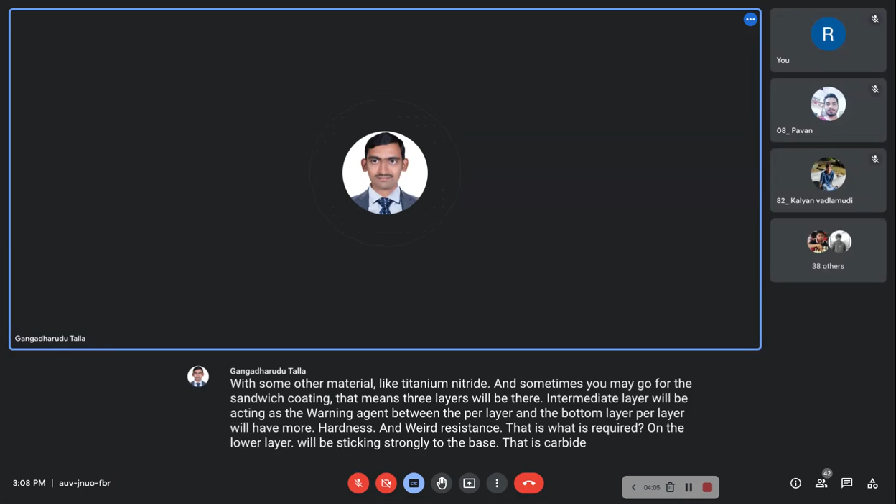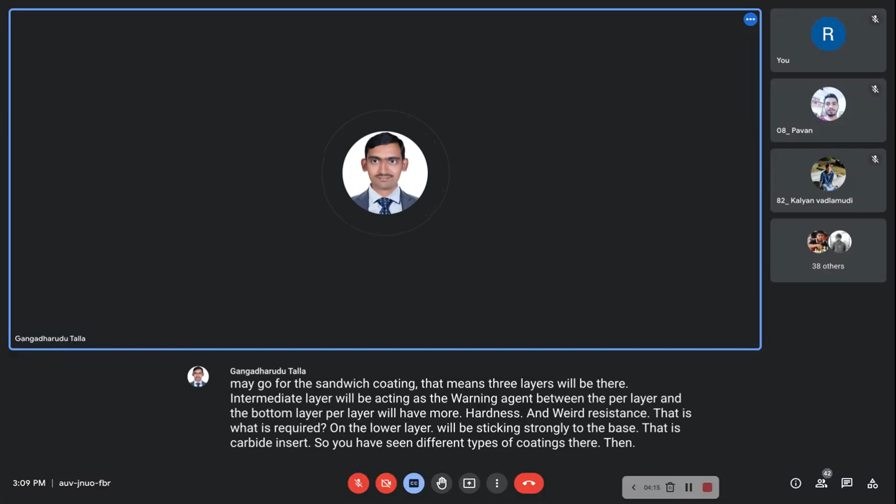So you have seen different types of coatings there. Then we have also discussed the ceramic materials. Mainly alumina is the widely used ceramic tool material, and some portions of silicon carbide, etc., will also be there. Okay, now I am presenting.

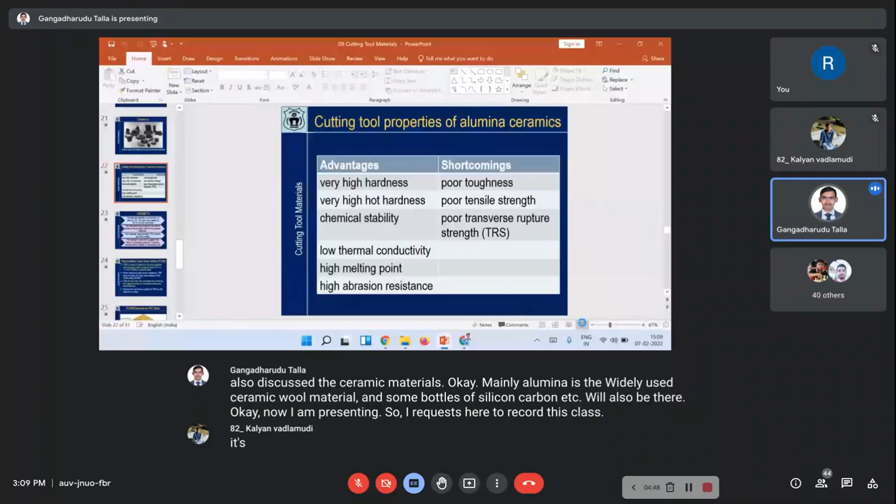So this we have seen in the last class: cutting tool properties of alumina ceramics. Now the next is cermets. As the name indicates, it is the combination of ceramics and metals. As we understand, ceramic has good heat resistance, very good hardness and very good wear resistance, etc. But the thing is, it is very fragile or brittle, so it can break when you are applying some transverse force. It will easily break. So to reduce that tendency, these cermets can be used.

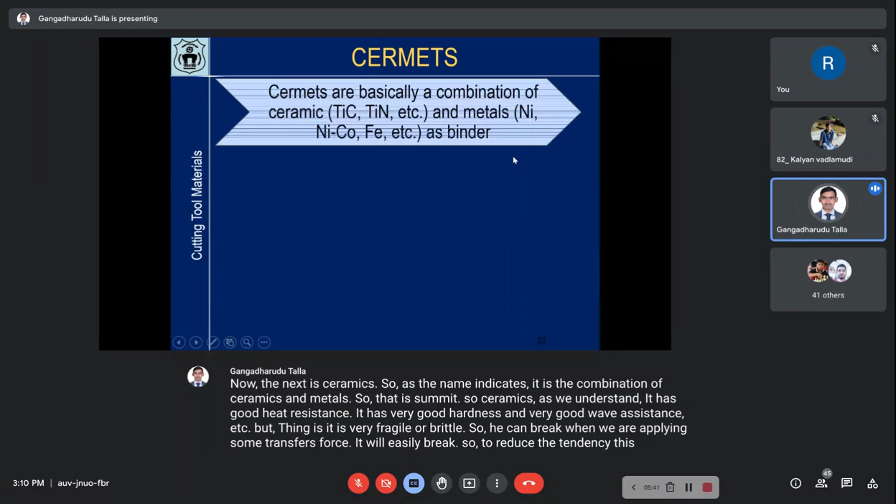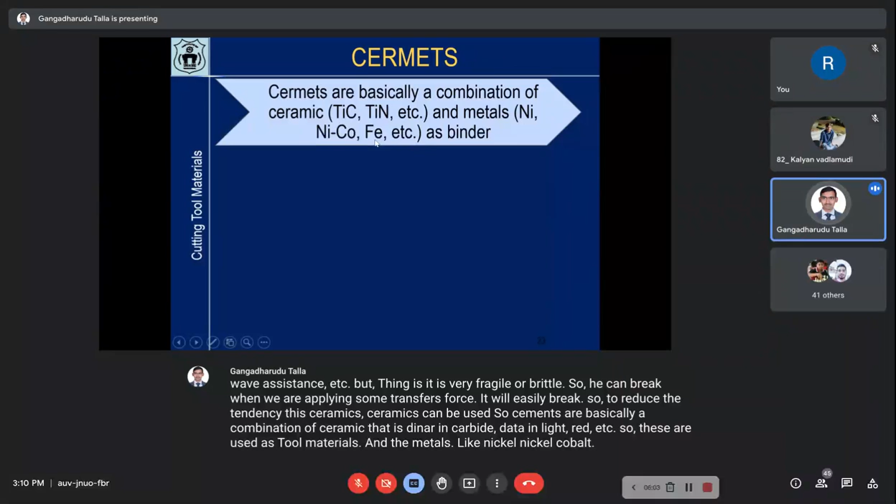So cermets are basically a combination of ceramic, that is titanium carbide, titanium nitride, etc., used as tool materials, and metals like nickel, nickel-cobalt, ferrous, etc., as binder.

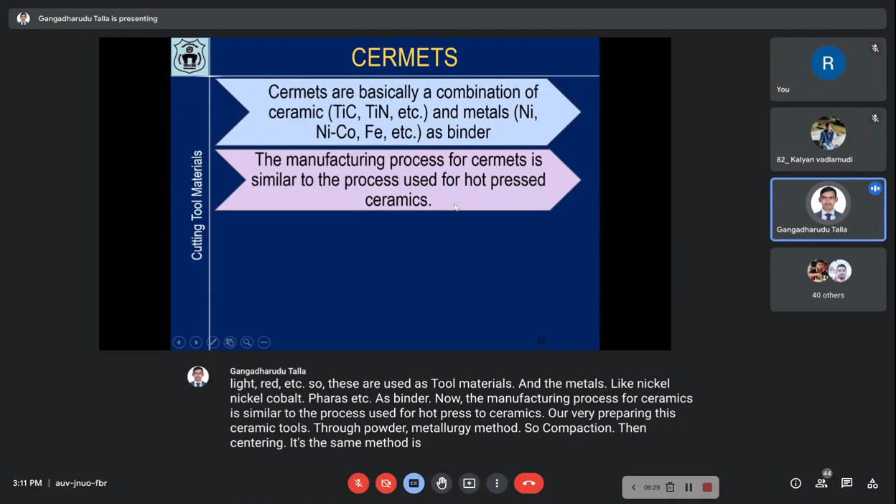Now, the manufacturing process for cermets is similar to the process used for hot pressed ceramics. How are we preparing the ceramic tools? Through the powder metallurgy method: compaction, then sintering. Same method is used here also. The material is approximately 70% ceramic and 30% metal. Most of it is ceramic, but for the binding purpose, and to increase the toughness, we are using the metal.

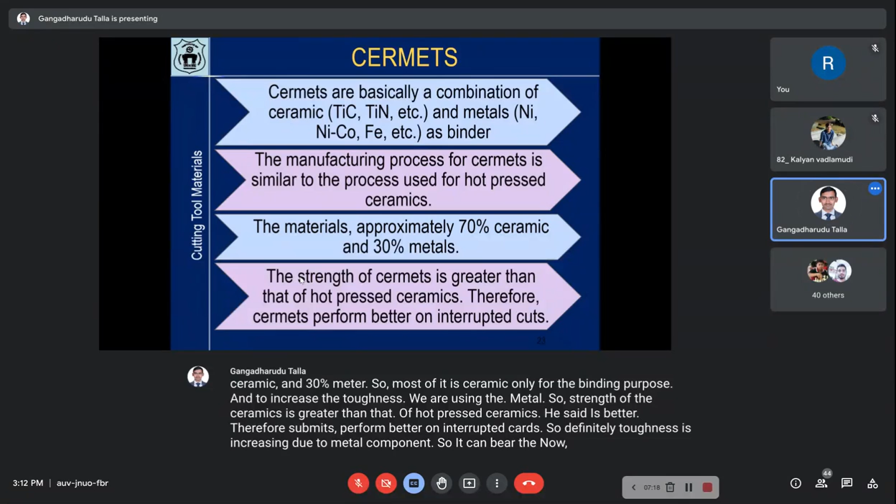So the strength of cermets is greater than that of hot pressed ceramics. Their strength is better. Therefore, cermets perform better on interrupted cuts. Toughness is increasing due to the metal component, so it can bear the interrupted force better compared to ceramics. That is about cermets. Now the next is

polycrystalline cubic boron nitride. CBN is cubic boron nitride. Polycrystalline cubic boron nitride is the material which is very close to diamond in hardness, and it is expensive also.

So it is like a synthetic diamond type. CBN is similar to diamond, it's a polycrystalline structure and is also bonded to a carbide base. So CBN will be bonded to the carbon base, the carbide base.

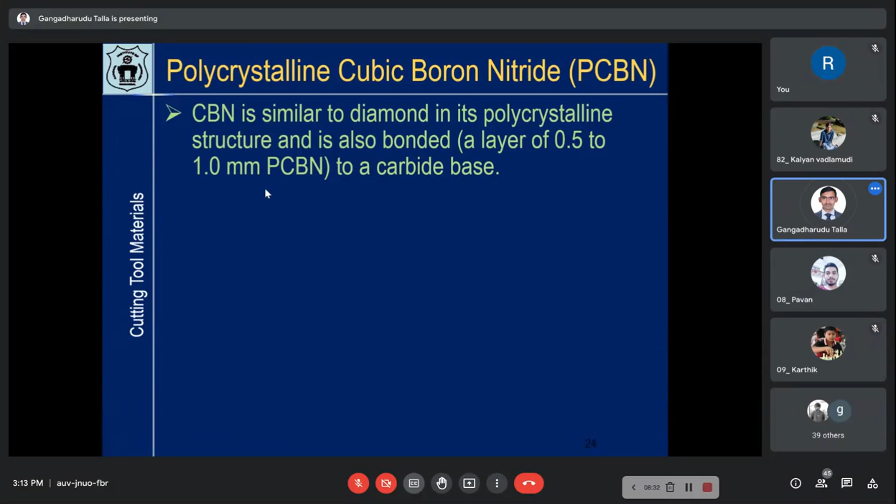The thickness of this CBN insert that you are going to use will be in the order of 0.5 to 1 mm only. Okay, very fine, very thin CBN insert will be taken and it will be attached to the carbide base.

While carbide provides shock resistance, CBN layer provides very high wear resistance and cutting edge strength. This is obvious. We cannot have entire CBN for the complete tool, it is very expensive. Even if you have CBN for the complete tool holder, its strength is anyhow less. Strength means toughness and the transverse rupture strength.

So for that purpose, we are using the carbide tool holder, then you are simply attaching this small piece. So you are taking the advantage of both.

CBN should mainly be considered as a finishing tool material because of its extreme hardness and brittleness. So you can use CBN for finishing process only because it is expensive. That is one thing. It is extremely hard and brittle.

If you are using it for semi-finishing and want to remove bulk amount of material, CBN will break. We cannot go for high depth of cut and low speeds, so that is not recommended. You have to go for very small depth of cut and very small feed using CBN. So that is finishing process. Use CBN for finishing only.

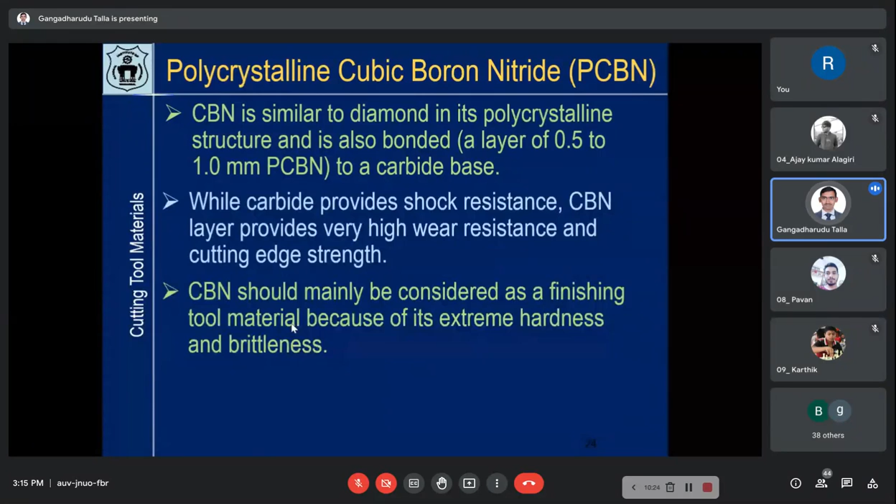Machine tool and setup rigidity for CBN, as with diamond, is critical. So similar to diamond, machine tool and setup rigidity matters. There should not be any vibration during machining. It should be very rigid, whatever setup you made.

Tool should be held very tightly, meaning it should not move during the cutting process. There should not be any vibration. That is very important, otherwise the tool will break.

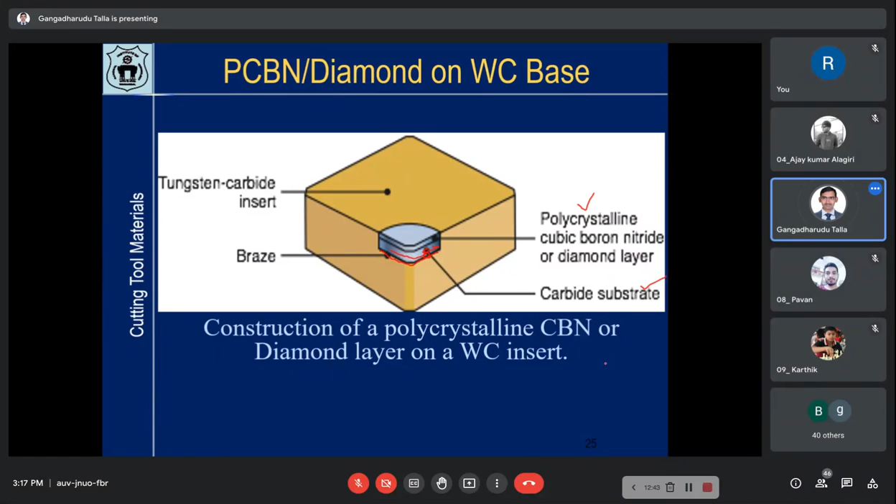So here you can see construction of polycrystalline CBN or diamond layer on carbide insert. Carbide insert generally means tungsten carbide only, sometimes titanium carbide.

Now another type of tool material is diamond. This is, as you know, the hardest material known. Diamond tools have very high hardness, so we are saying this is almost the hardest. Now, very low friction - friction will be very less if you are using a diamond tool.

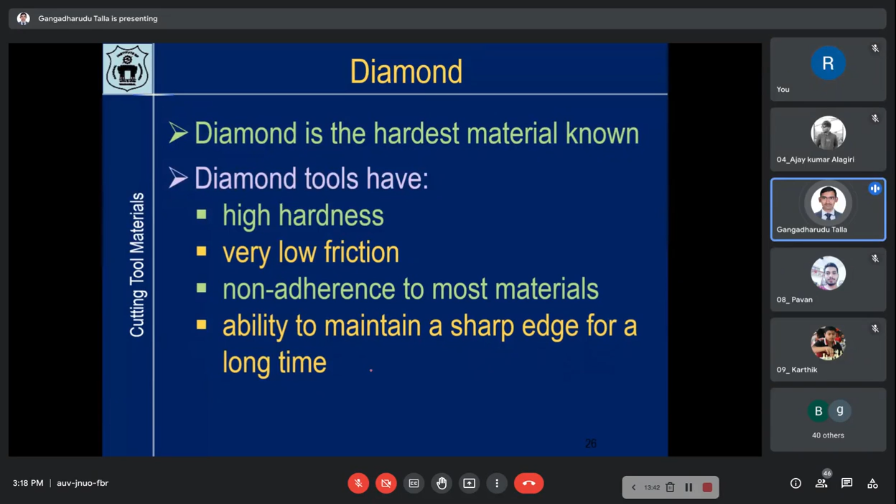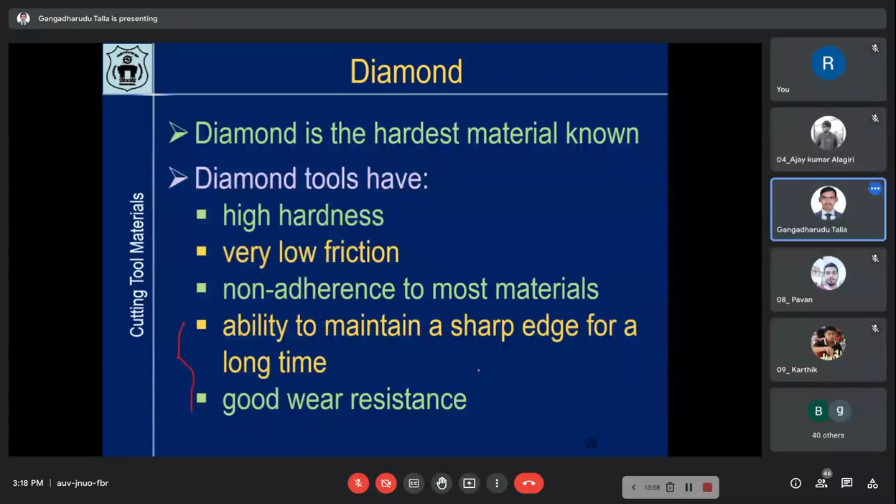Non-adherence to most materials, it will not adhere to most materials - that is an advantage. Ability to maintain a sharp edge for a long time, so its wear is also less. Of course, good wear resistance - these are not separate, all are interdependent. So those are the properties of a diamond tool.

But if you are using diamond as tool material, some of the precautions: rigidity in the machine tool and the setup is very critical. TWF is tool, workpiece and fixture. So this should be very, very rigid.

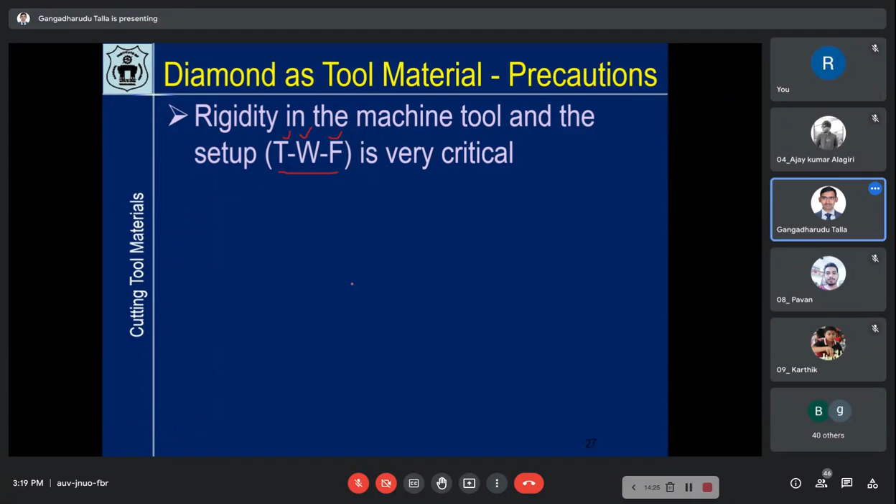Now because diamonds are pure carbon, diamond is nothing but carbon. So they have an affinity for the carbon in the ferrous material. This is obvious, so therefore they can only be used on non-ferrous metals.

Because diamond contains carbon, if you are machining a carbon-based metal, there will be diffusion. That will finally deteriorate the shape of the cutting tool, so machining will not be proper. You should not machine carbon-based metals. Generally ferrous metals have carbon, so you machine non-ferrous metals.

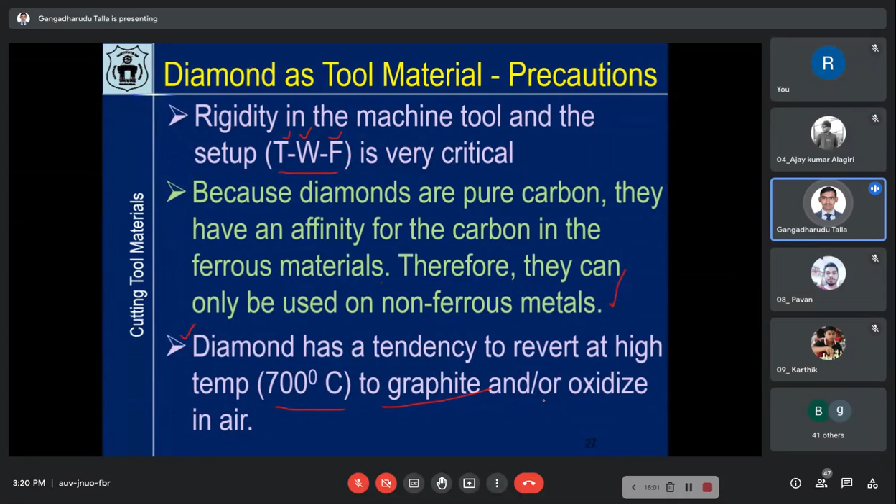Diamond has a tendency to revert at a high temperature, about 700 degrees Celsius, to graphite, or oxidize in air. Diamond is nothing but highly pressurized graphite. If you heat it to around 700 degrees Celsius, there is a chance it will go back to the graphite stage, and it may oxidize in air also. So you have to take care that during the cutting process, temperature should not go very high. That is important.

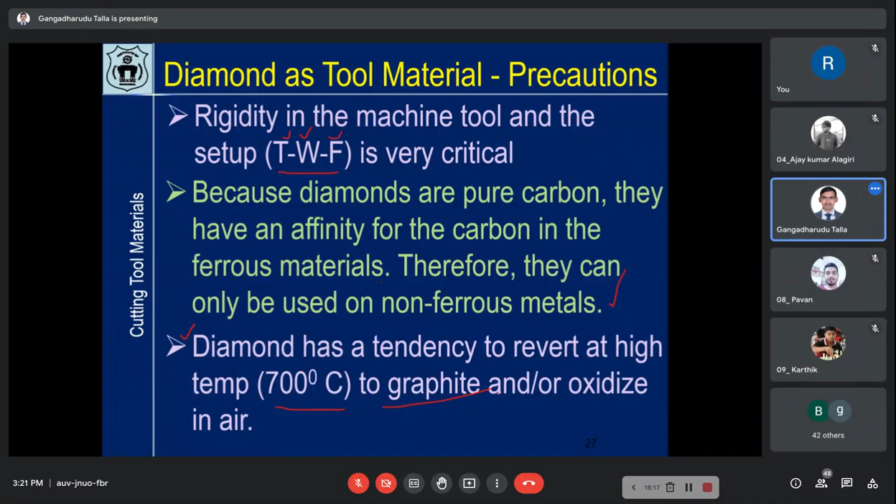Diamond cutting tools should only be used for light finishing cuts of precision surfaces. This is again true in case of PCBN also. Because its transverse rupture strength is very less, you cannot use high feed and high depth of cut - if you do, the diamond tool will break. So feeds should be very light, and speeds are usually in excess of 1500 meters per minute - very high, compared to the speeds you've seen, 30 or 40 meters per minute, like earlier for carbon steels and HSS where the speed range was very low. Here it is very high compared to that.

Diamond is very brittle and costly to shape into cutting tools. It is very brittle, so you have to handle it very carefully. If it falls from some height, or if some impact load comes onto the tool, it will break. And shaping the diamond tool is very difficult, because diamond is very hard, so if you want to cut that diamond, it is a very difficult process.

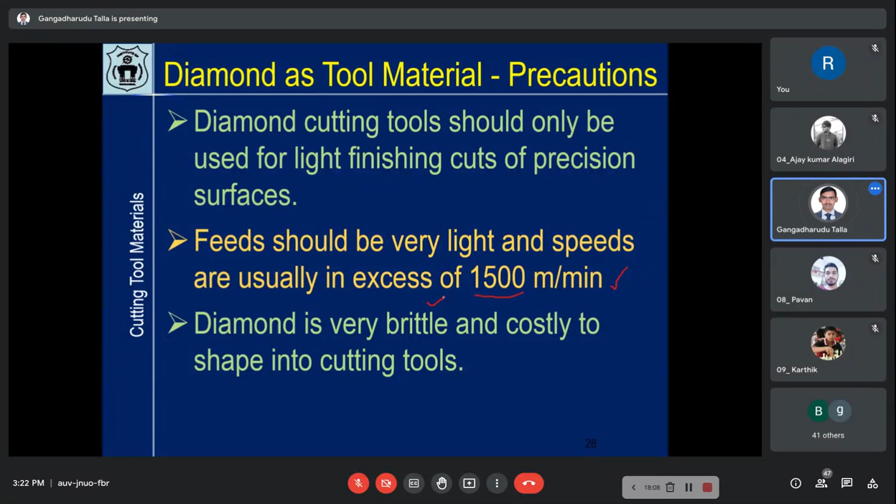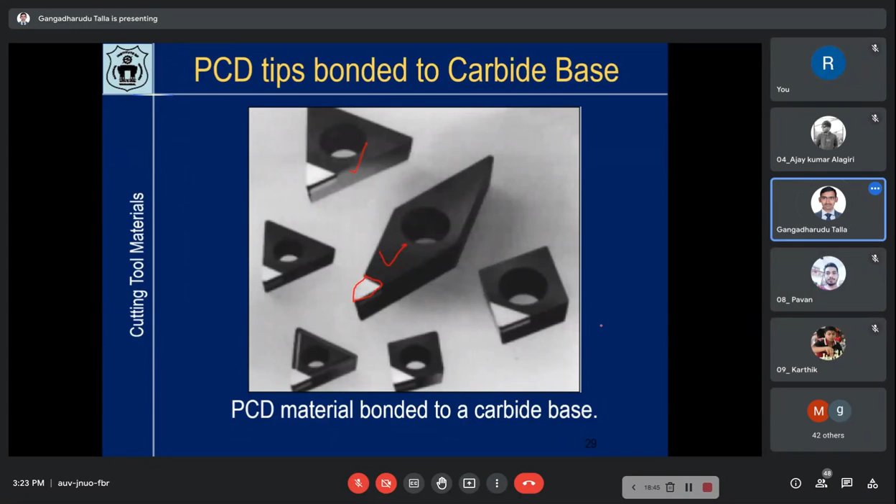So you look at the material - HSS is very cheap, followed by carbide inserts, then coated carbides, ceramic, then CBN, diamond coated inserts, then diamond tipped inserts, in that order. Diamond is very expensive, CBN is also expensive. So if a cheap tool material can remove material from our workpiece, we'll use that only. Only in special cases where you are dealing with very high strength materials will we go for those types of tool materials.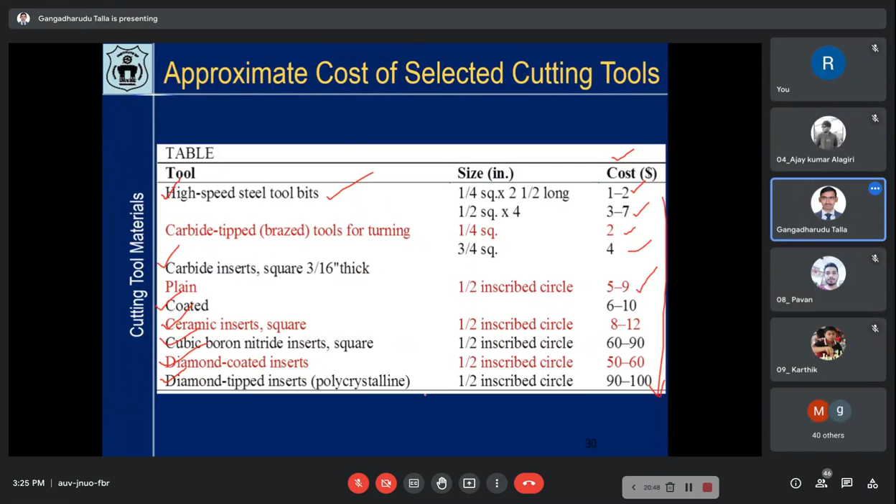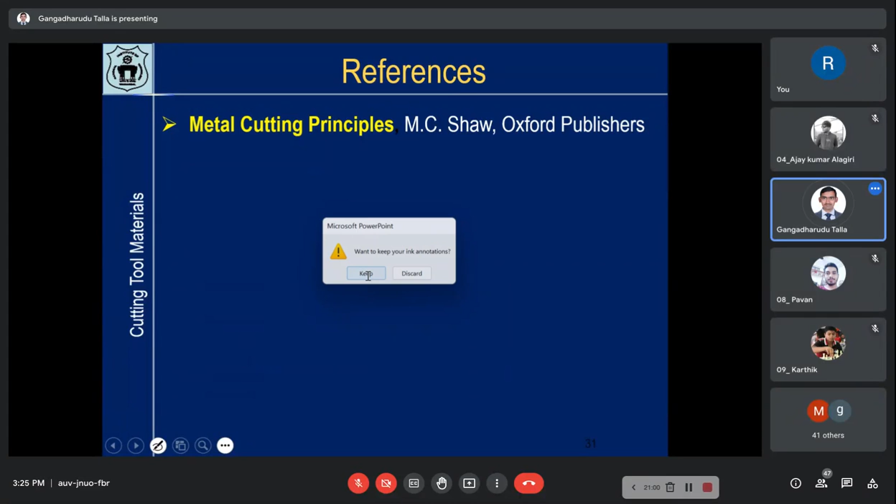So that's it, this is about various tool materials that we use in the machining process. Any doubt here? So today let us conclude this. We will discuss the fresh topic tomorrow - it is thermal aspects in machining. Any doubt in today's topic? We discussed ceramics, CBN and diamond.

This topic is almost a theory type - there is no single equation, nothing. But you have to understand why the properties are varying. From carbon steel to diamond, the machining speed is increasing gradually, and the toughness of the tool material is decreasing, while hardness is increasing and brittleness is also increasing. In that order we have discussed the tool materials, and of course they are becoming more expensive in that order too. Those are the properties you have to understand.